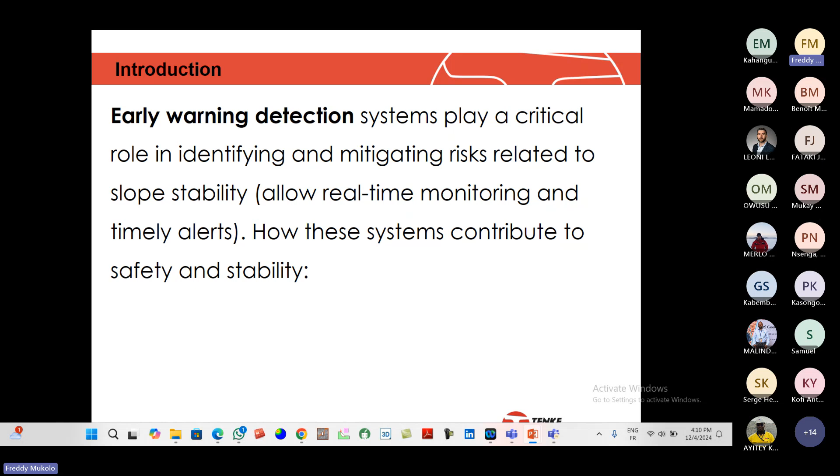Early warning detection systems play a critical role in identifying and mitigating risk related to slope stability, allowing real-time monitoring and timely alerts. How do these systems contribute to safety and stability?

First of all, we can use inclinometers, which measure the tilt and angle of slope movements, providing early warnings of instability. We can also use extensometers, which monitor the extension within a slope.

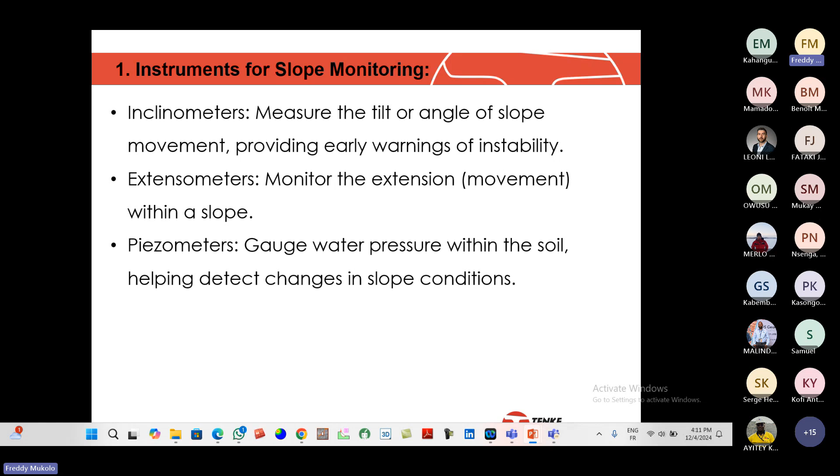We can also use piezometers, which gauge water pressure within the soil, helping detect changes in slope condition. We can also use radars, which help detect ground displacement in real time.

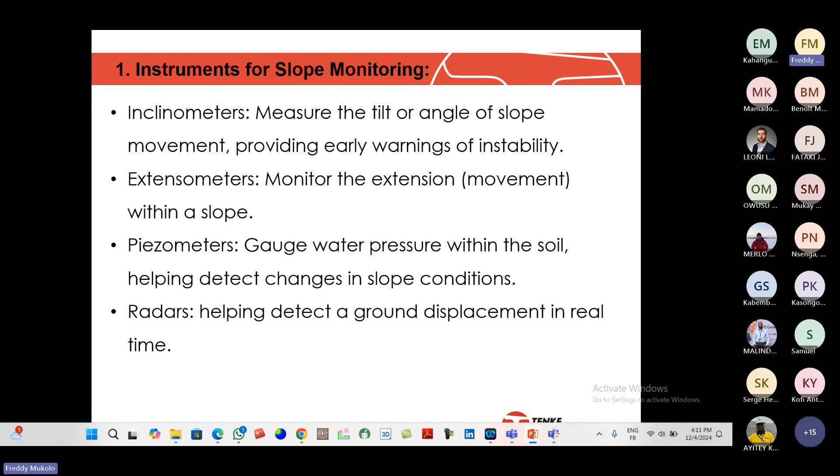What is the benefit of the early warning system? The first benefit is risk reduction. Early detection enables proactive measures, reducing the risk of loss of life and property.

Secondly is stabilization measures. Alerts trigger timely evacuation and implementation of stabilization techniques. And the third is cost savings. A single-degree increase in slope angle can save millions in stripping costs, but safety remains paramount.

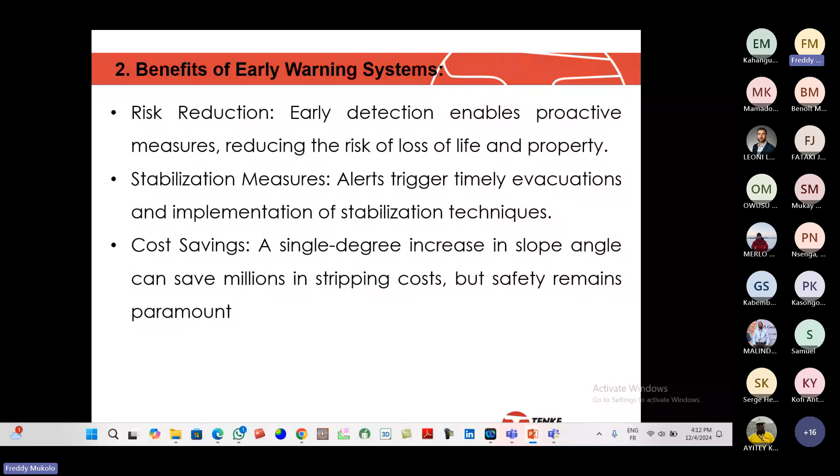Application of the early warning systems: we can apply the early warning system in open pit mines. In mining, monitoring high and steep slopes is crucial for safety.

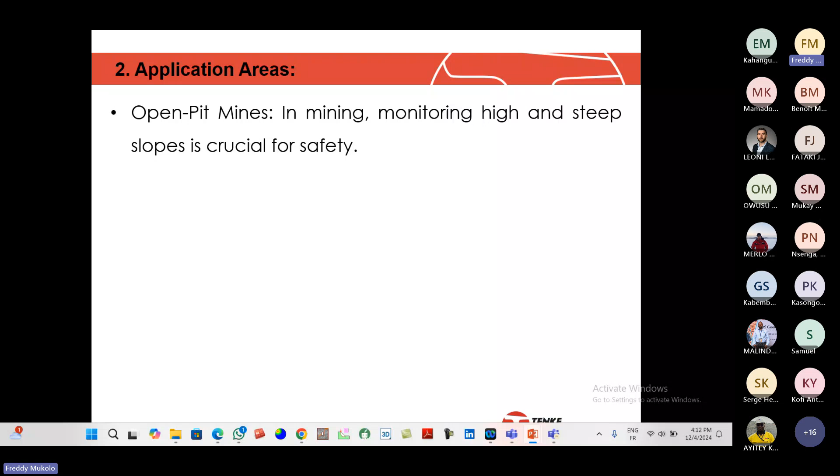We can also apply early warning monitoring in natural slopes. Early warning systems prevent disasters in hilly and mountainous regions.

We can also use the early warning system in infrastructure, which will allow us to detect any slope instability which can affect roads, railways, and buildings.

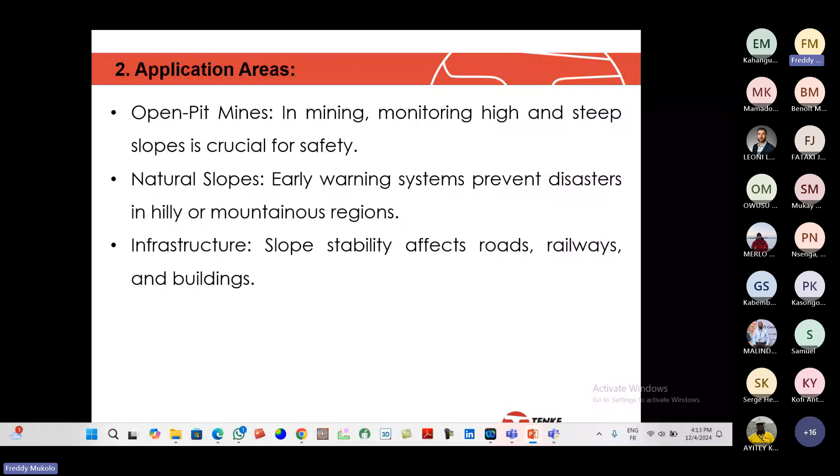What is the practical way to achieve the integration of early warning systems? The first is slope deployment and data collection, which means two parts. Instrumentation: we have to first install instrumentation such as radars, inclinometers, or piezometers at critical locations on the slope. Secondly, we have to implement automated data collection.

When implementing automated data collection, we also have to continually monitor the behavior of the slope by displaying the displacements, and maybe the water pressure in case we install piezometers.

The second way will be data fusion and real-time analysis. All the data has to be centralized in a data hub. We can use multiple techniques to combine information from multiple sensors, and we can also make a real-time analysis algorithm to detect any abnormal trends.

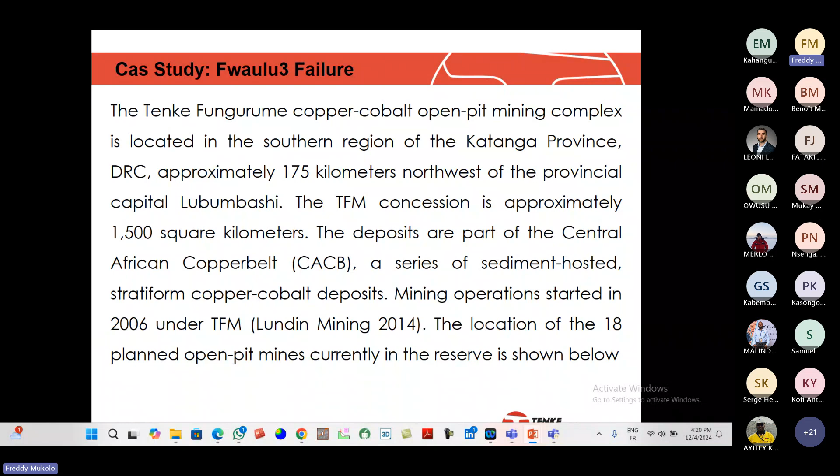Mining operation started in 2006 under TFM, Lundin Mining. The location of the 18 planned open pit mines currently in reserve is shown below. This is almost the location, and the failure occurred at this complex where there is Fwaulu.

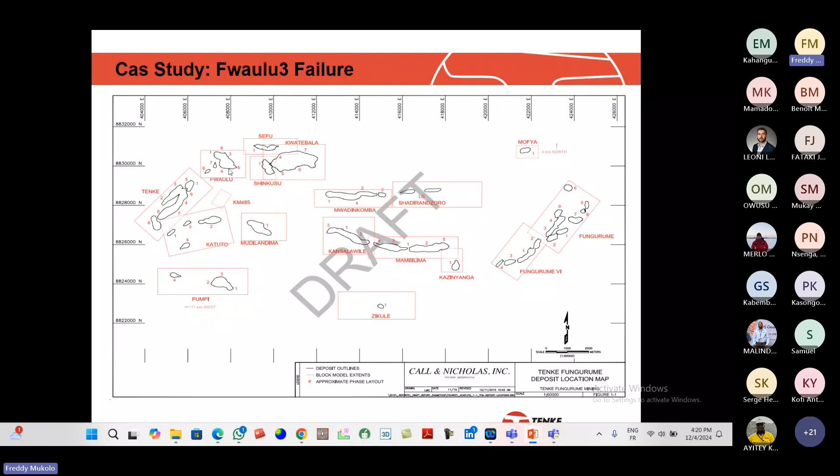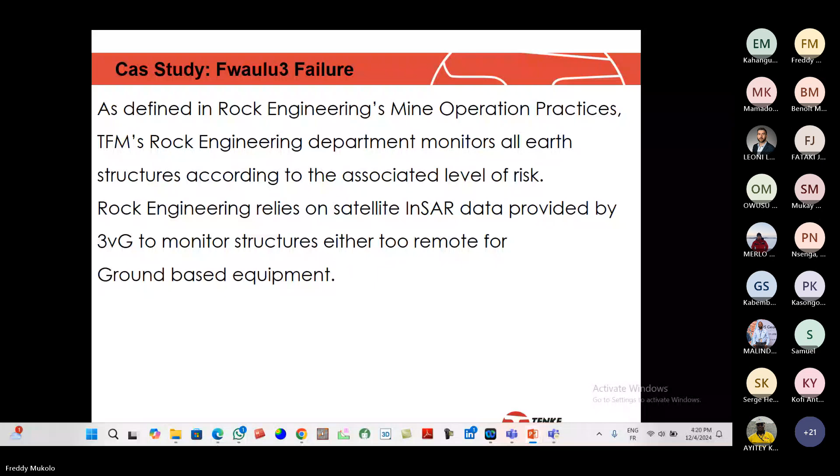As defined in Rock Engineering's Mine Operation Practices, TFM's Rock Engineering Department monitors all structures according to the associated level of risk. Rock engineering relies on satellite InSAR data provided by 3vG to monitor structure, either too remote for ground-based equipment. The rock engineer team reviews the data to identify areas which have started to move and where additional monitoring is required.

After field inspection indicated increased movements, an IBIS-FM radar system was deployed in January 2016 to monitor the movement in real time, because the IBIS-FM provides reliable early warning for progressing slope movements, potentially leading to slope failure, and can map long-term evolution of slow-moving slopes.

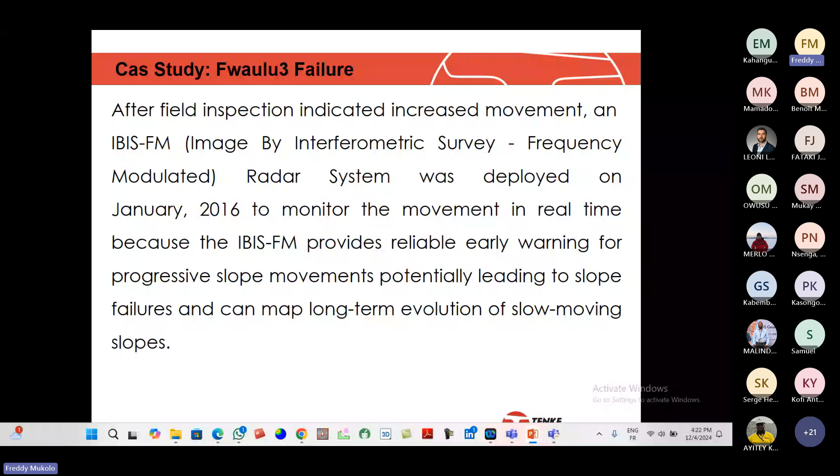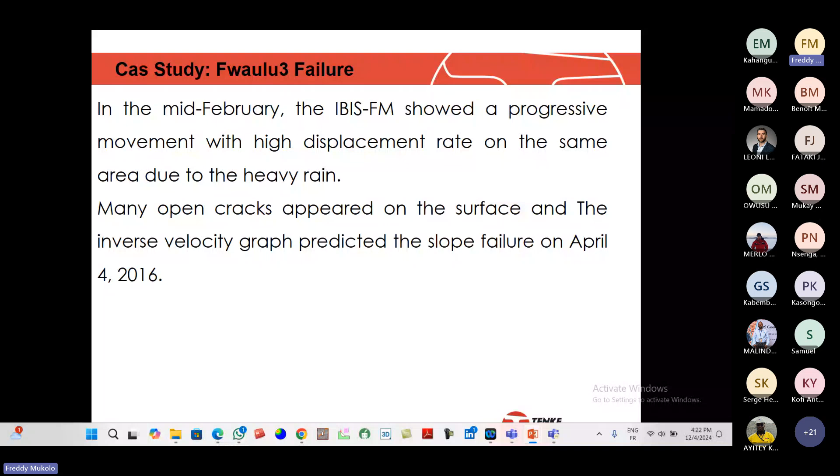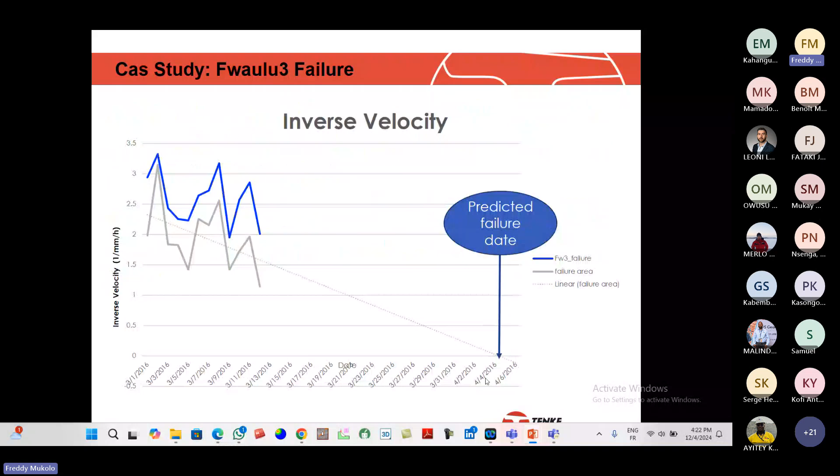In mid-February, the IBIS showed a progressive movement with high displacement rates on the same area due to the heavy rain. Many open cracks appeared on the surface, and the inverse velocity graph predicted slope failure on April 4, 2016. This is the prediction for the inverse velocity, and the inverse velocity predicted a failure on April 4, 2016.

In March we observed a very fast movement, and when we observed this very fast movement, some action was taken to make that area a critical area for critical monitoring. When we check the trend of the graph, you'll see the movement becomes very, very high, and the speed becomes very, very high.

This is the data record on the 11th of March. This is the second area, on the same place, which is showing almost a catastrophic scenario.

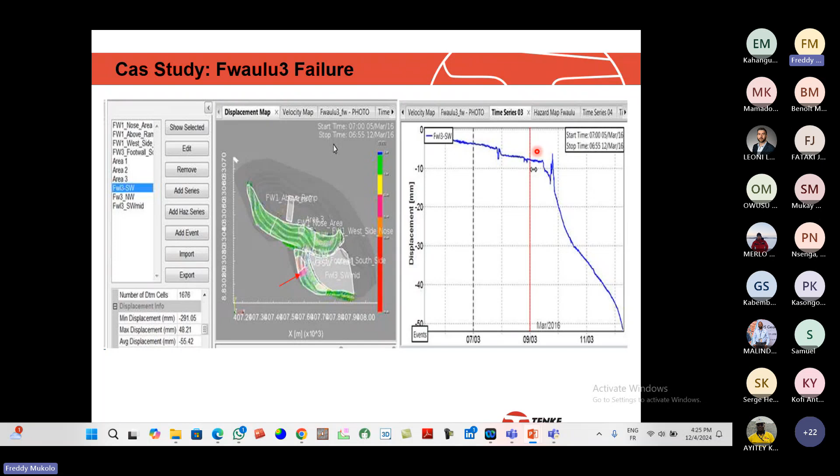After observing these movements, we made the decision to close that pit because we observed that the movement becomes very, very high, and this was very dangerous for people to work under this area. This is the situation observed in the field, and we sent an email to our security team to evacuate all the people working in this area.

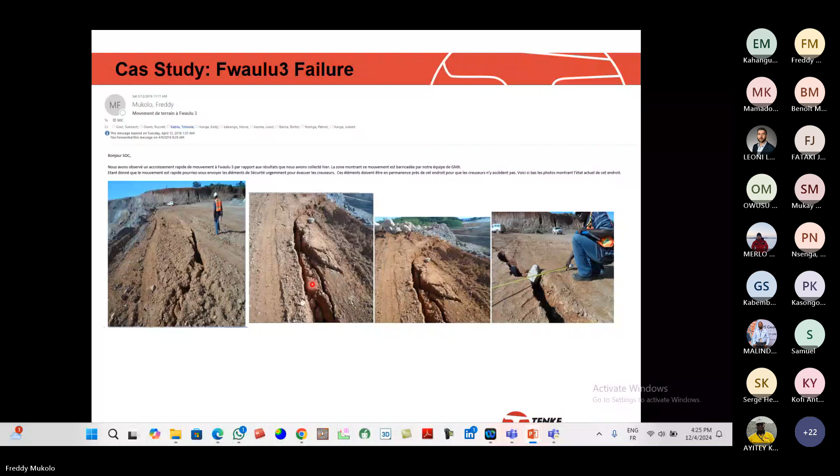During the progressive excavation of Fwaulu 3, a failure occurred in the southwest wall of Fwaulu 3 on March 12, 2016, at 1449. The failed slope extends between 75 and 100 meters along strike and has a height of approximately 45 meters, extending from the wide bench at 1425 meters to the pit toe at 1380 meters. The failure was controlled primarily by structure and was exacerbated by talcaceous material within the RAT/Dipeta breccia, and elevated pore pressure due to the rain season.

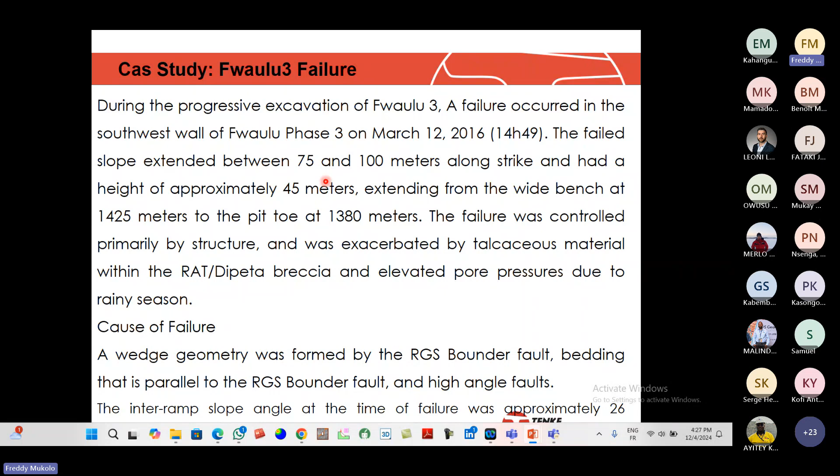This is almost the displacement graph, showing a time series of that moving area, and in this area is where we record a failure.

What this shows is almost the same thing. What we can say here is that the data received and recorded from the radars helped us to quickly take the decision to evacuate the pit without having injury, heavy death of people, or covering of equipment. And when we tried to go back and see why this movement increased a lot, we found that...

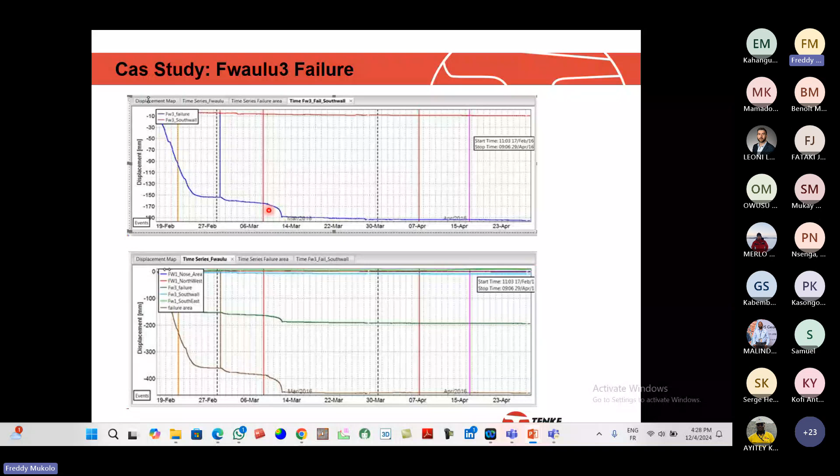this movement increased because of the rainfall recorded in February, and this confirmed why we recorded the failure earlier than predicted, which was predicted in April. This is almost the material, the failure material, and the failure records.

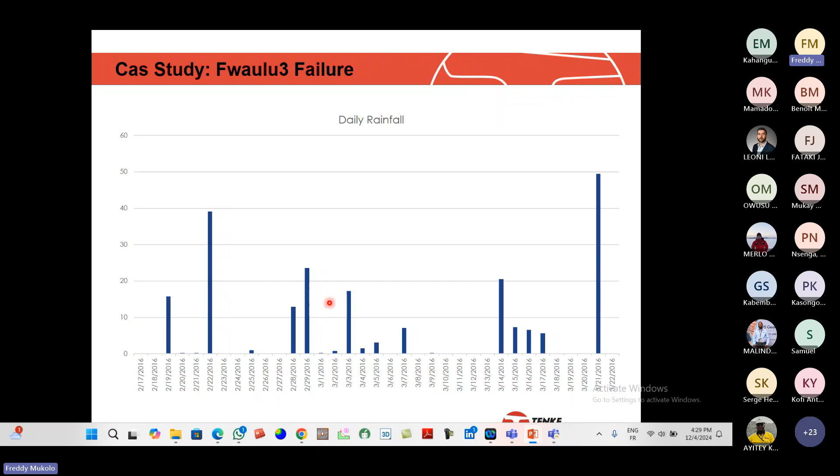And as you can see, our berm was somewhere here, and the failure material went beyond our berm limits. All the people were evacuated, and we managed this failure successfully. This is the presence of the talc, which contributed to this failure.

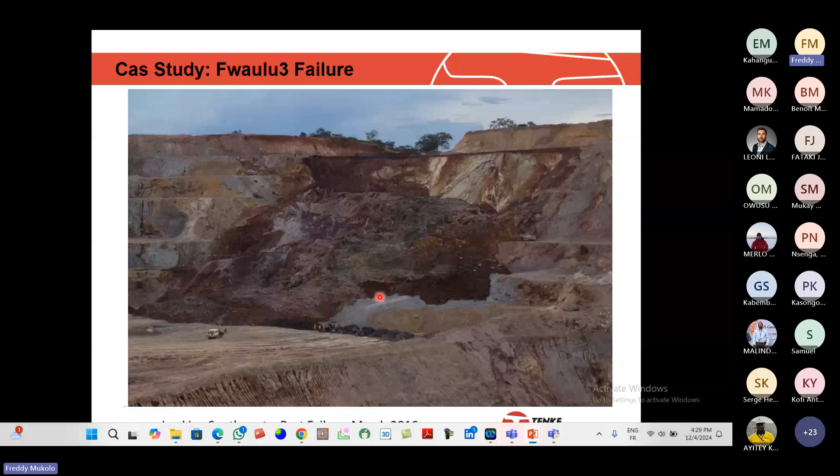In terms of remediation, TFM rock engineers and consultants recommended removing the failure material and creating a step out at the 1387.5-meter level. A rock berm was proposed before continuing the slope, with the direction perpendicular to bedding. Back analysis of the failure slope was completed using the SWedge software.

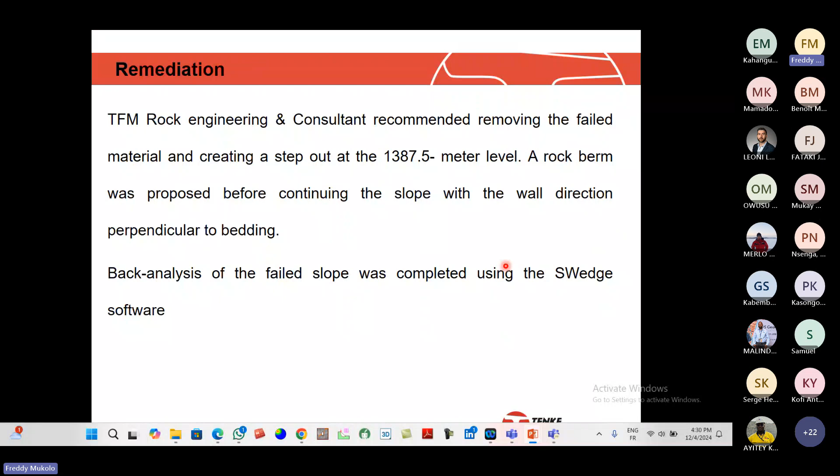The geotechnical action plan for working in the failure area was implemented, and this is an example of the gap which was made to remediate that area. In short, in this gap, we recommend working under radar monitoring, and the radar should work perfectly before starting any job in this failure zone.

In the case of a yellow alarm, the geotech will check the radar data and inform all the operations personnel on the future action. In the case of a red alarm, all people should evacuate.

In conclusion, mining excavation and weather generally affect the stability of slopes, and hence require proper monitoring even after providing support measures, especially under complex and heterogeneous geology. From this study, the significance of the IBIS-FM radar system for high slope monitoring with high accuracy around the clock is well evident.

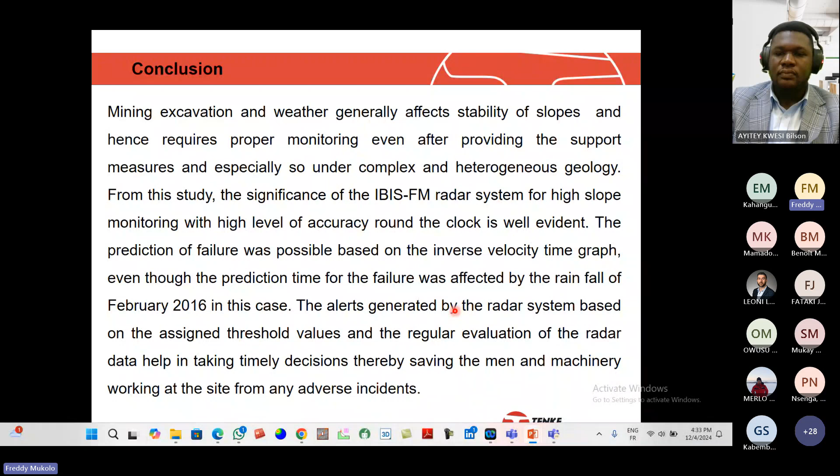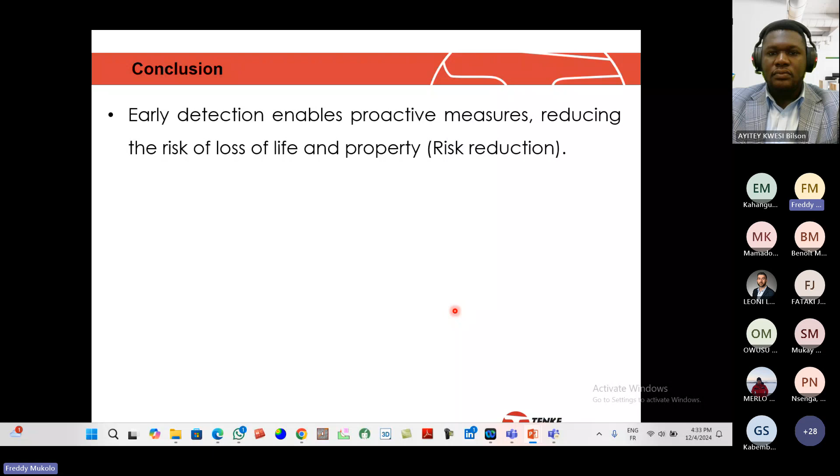Early detection enables proactive measures, reducing the risk of loss of life and property. This is the risk reduction: alerts seek timely evacuation and implementation of stabilization techniques. Integrating early warning systems into existing slope monitoring practices is crucial for enhancing safety and preventing disasters. Thank you.

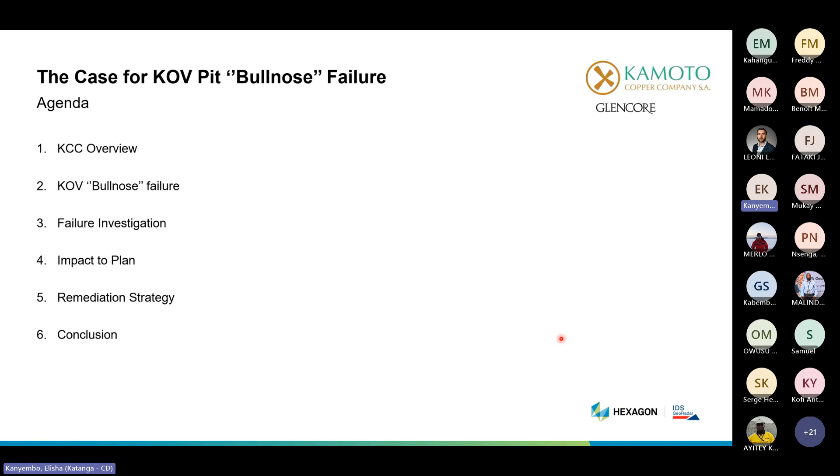So the agenda will be KCC overview, KOV Bullnose failure. I will be presenting the failure itself, the investigation we did when we had the failure, the impact to the plan - most of the time when we have a failure there is always an impact to mine planning - the remedial strategy we use to remediate the failure, and what should be the conclusion at the end.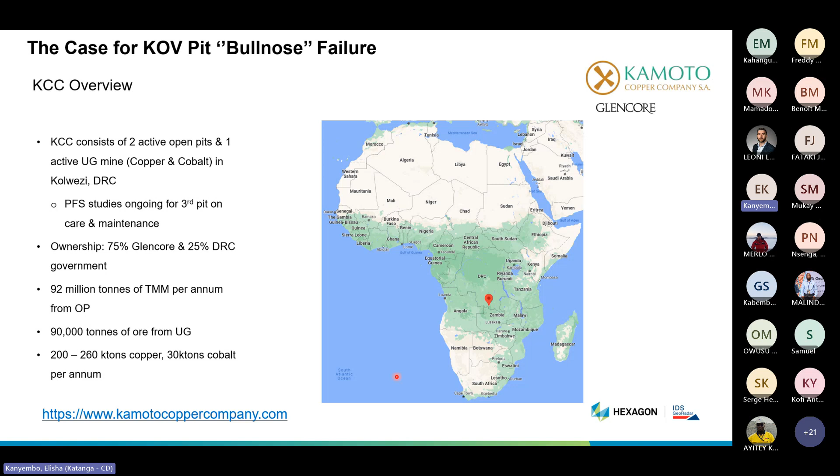The movement was tracked by our radar system. The red alarm triggered, orange to red alarm, and our TARP has been followed as stipulated. As you can see, there was 20 to 29 hours between the alarm and the collapse, between orange and red alarm, so there was enough time to manage the evacuation.

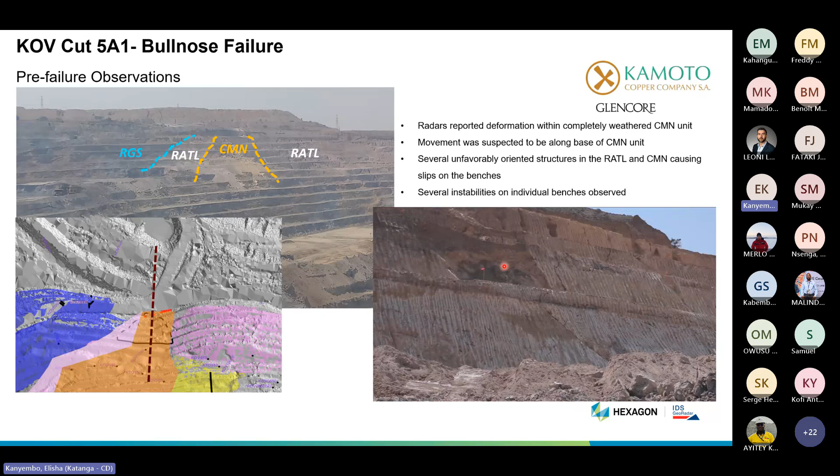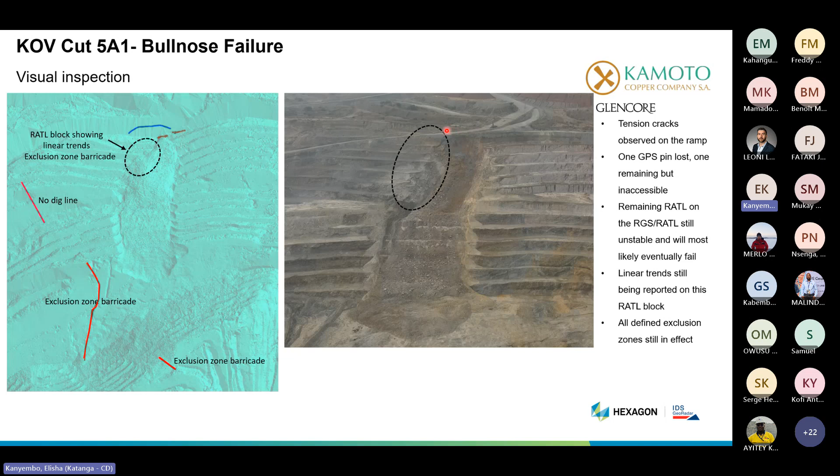And then quickly, this is the failure timeline - I could present it to you guys the way we managed this failure. I can share with you some confidences: since we had that fatality in 2016, we were using a radar system, but the problem was the communication, which was also problematic at that period.

After that fatality, I gave myself a commitment that it would not be possible as far as I would be waiting for KCC to have another fatality, because as a geotech it is really sad - you have to prevent this kind of catastrophic event, but the main purpose is just to save life. And if you fail to save life, that is not something you can appreciate in all your life, because that will remain and you will remember it all the time, so it is not good.

But here we can see that we followed the process. In June to August, slow linear movement was detected on the slope from our ground-based radar, which is the IDS radar, the one that we are using.

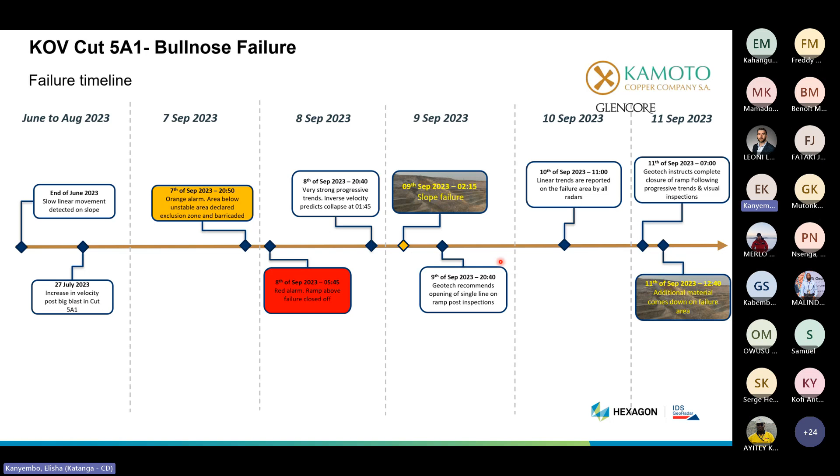Now the failure investigation — the failure occurred, so the work of a geotech didn't stop there. We must now investigate what the failure mechanism was, what drove all of this instability, what the issue was. This is what a geotech has to ask himself: what was really the main issue, what caused this failure to happen? Because the design had been done, reviewed and analyzed, and we provided all that was supposed to be done, but how is it that the slope didn't stand?

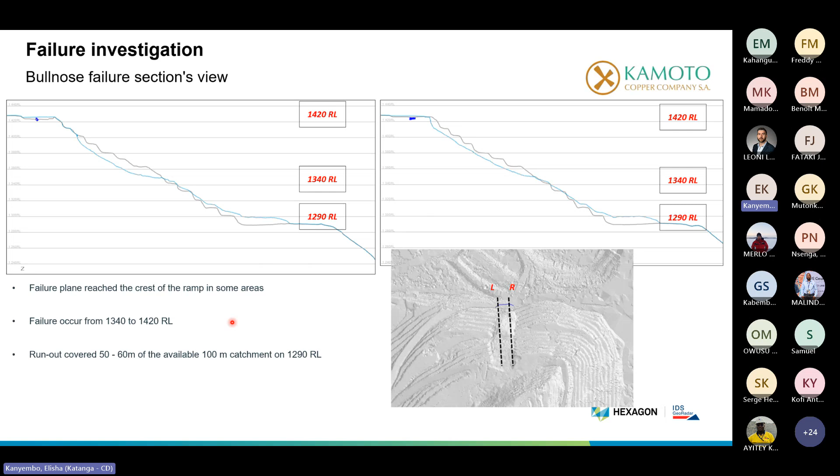You can see here that it's the top benches that failed, and the failed material overspilled on top of the bench below and filled the 1290 RL. At the two sections, they show almost the same situation. We went through and investigated the failure mechanism — we have boreholes within this area, so we checked some boreholes and logs, and we found this KOV 1085 borehole.

This one, because this is the failure where the failure occurred. And we found that the failure surface aligned with the initial hypothesis that we were just investigating, that the instability is driven by that contact, CMN-RATL contact. So the location of this contact will determine how far back the instability can extend.

Because we said, okay, let's look at this data. And we checked the TECT model, and we found that this contact is not in the TECT model, because this CMN here was logged not as CMN, but as saprolite. This was also the mistake, because when we did the model and analyzed the design, we didn't take into consideration that we have CMN talc within this contact. So it says saprolite, but it's different from CMN talc, and the confidence in orientation, etc.

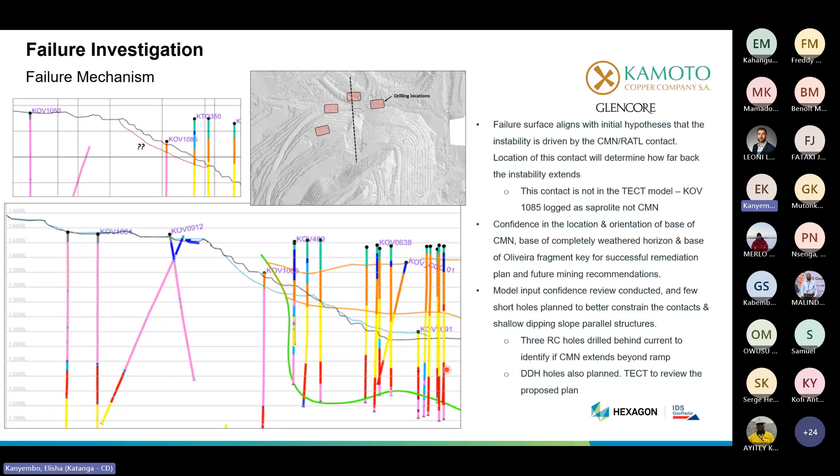So we found that, and we said, okay, in this case, let's drill some additional holes within this area just to try to demarcate the extent of this CMN-RATL contact. We should first understand where the contact is, because we know that contact is the weak contact that has driven the instability. After the geotech assessment, etc., we drilled, tried to understand all of that, and demarcated the CMN-RATL contact.

But what was the impact to the plan? Imagine at the top here, there was the main access to the North Dump. The North Dump is the biggest waste dump in KOV, where all the waste from the mine is dumped. This access is at the top of the failure, so it was closed and blocked. We could not send waste material to the North Dump in the meantime.

But we had the other dump, Mashamba North Dump. So we could just send waste to the Mashamba North Dump, with the risk of filling this dump faster than planned. So you see that was the impact to the plan. And also the impact to the plan was on reduced ore tons and copper content in 2024, so it has impacted even the production of copper content in 2024.

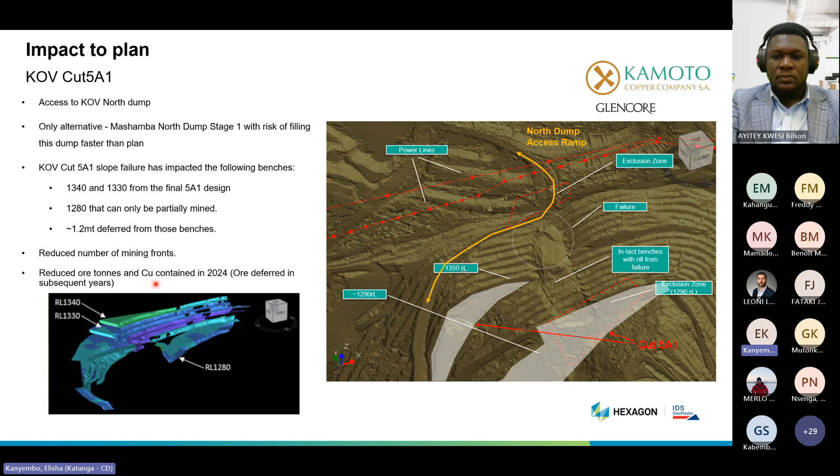But within the same area, we have pole lines, electrical pole lines. I think within the same area there's the power line and also the relocation of the GCI North power line. So we have power lines here, and they were the constraint for the new access.

Anyway, what we said was the remedial strategy: there is this access to the North Dump, and there is a design that, first of all, we said let's clean up. There is a cleanup of the catchment below, and a cutback design, all of them. So we found that to remediate this situation, let's have a temporary access, try to clean the material that filled our catchment below on 1290, and let's create an access here on 1350 so that we can stabilize the area.

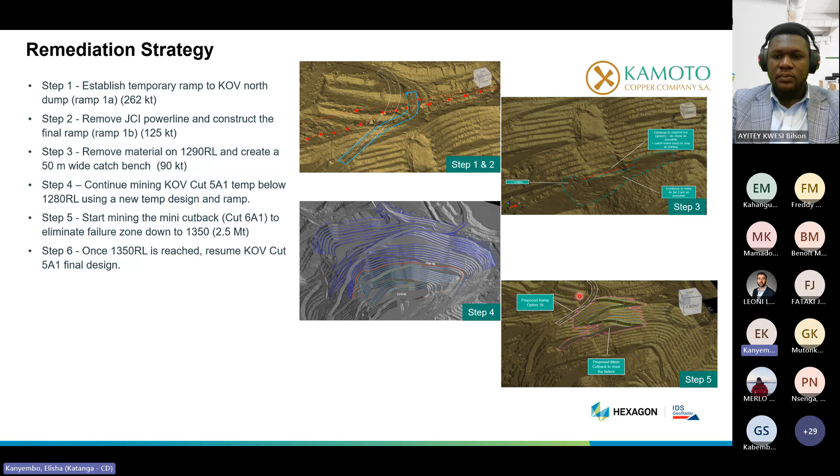So all of these things were just options, okay? And definitively what we did is clean up the failed material. We cleaned failed material, I can say overspill material, on 1290 RL. So we cleaned that one. We put a risk assessment together and we cleaned safely.

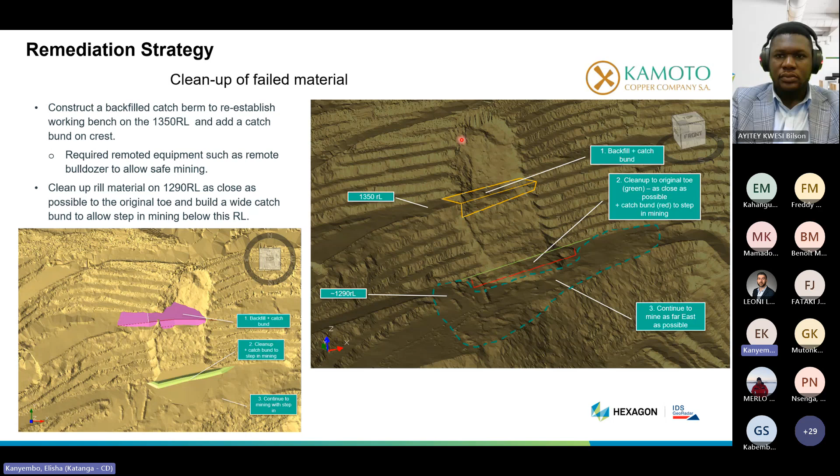And we said, let's go and establish the catchment, the bench here on 1350. For this one, we didn't succeed, we failed to make it. At the time we were doing that, the hanging material on top was just falling down, and we abandoned that option. We moved to the cutback option.

So this was the proposed cutback, and this is what we did. So the design of a mini cutback, and we mined with this design, which took into consideration the drilling we did to demarcate the CMN-RAT contact. The cutback design took that into consideration, so that we mine all the CMN and leave the slope only in RAT, which is good material for us.

It's not that good, I told you that the weathering here in KOV Mine is really high. So fresh rock, yeah, is not the language we're talking here, fresh rock. We only have highly, moderately, and completely weathered material.

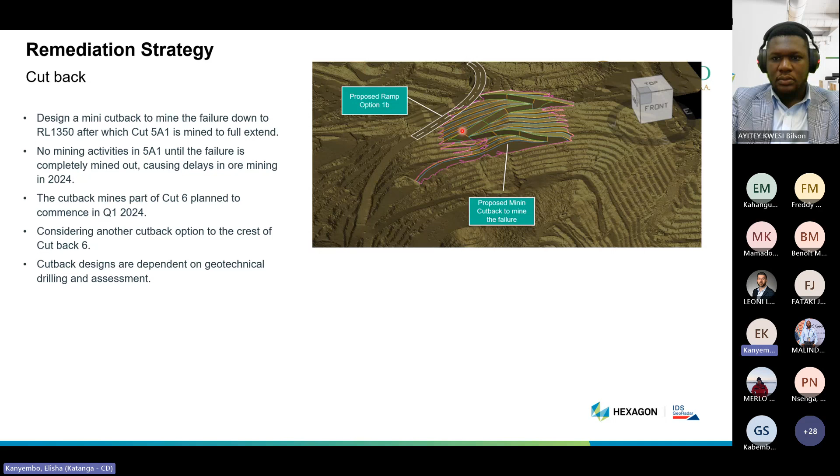So we went with this mini cutback, and we cut. It was a good work under radar monitoring. All the remedial work has been done under good supervision, with visual inspection and radar monitoring. Anytime there was movement, we stopped activity, did visual inspection, amended the recommendation, etc., up to where we finished the work.

So you can see this is the mini cutback that we did, and we cleaned up all the failure. You could see the difference between the failure picture that I started with during my presentation and this end picture, the last picture. This is the remediated failure. Right now you can see that we established all the benches up to the 1350 RL, and we continue with the normal design, what I call Cut 5A1 final mining, progressing.

Actually, this is an old photo because now we are on 1280 RL. So we continue with the normal design now. And the area at the back is stable, sitting, with no further movement within this area.

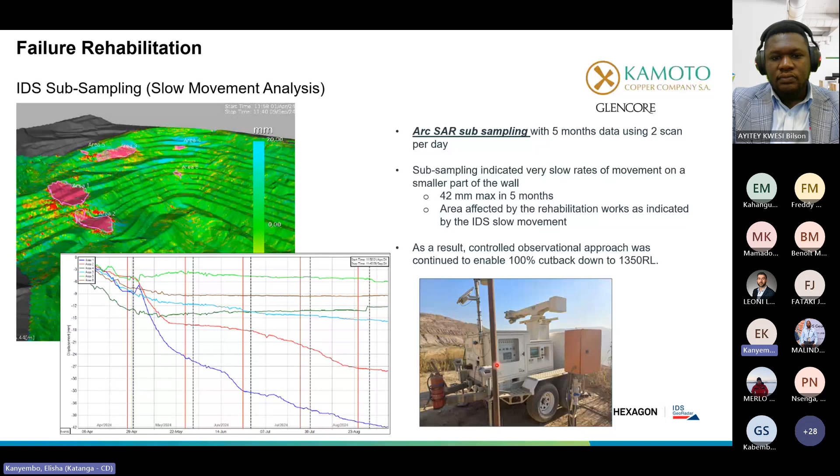As you can see, we did even slow movement analysis. The subsampling has been done. We took 5 months of data using 2 scans per day, and the subsampling is showing us 42 millimeters maximum in 5 months. That means the movement is very slow and nothing to worry about for now. And we have this ArcSAR which is monitoring that area.

So guys, this is the end of my presentation. The key takeaways for you guys, the one that I think you can remain with, is proper management of a structural control failure, like this one for KOV Cut 5A1 nose failure, by using slope monitoring procedure, interpretation of failure mechanism, and remedial plan.

So the proper management is using the monitoring procedure properly. You must have your TARP, and your TARP must align with your site. You can't copy my TARP and use it at your site. Every specific site must understand the failure mechanism of the area by doing back analysis, and you come up with your threshold for your alarms that match well with your site. And this is what you're going to put in your TARP.

And you must very well interpret your failure mechanism, so proper core logging, face mapping, you understand all your structure, etc. And you must come up with a good remedial plan as a geotech.

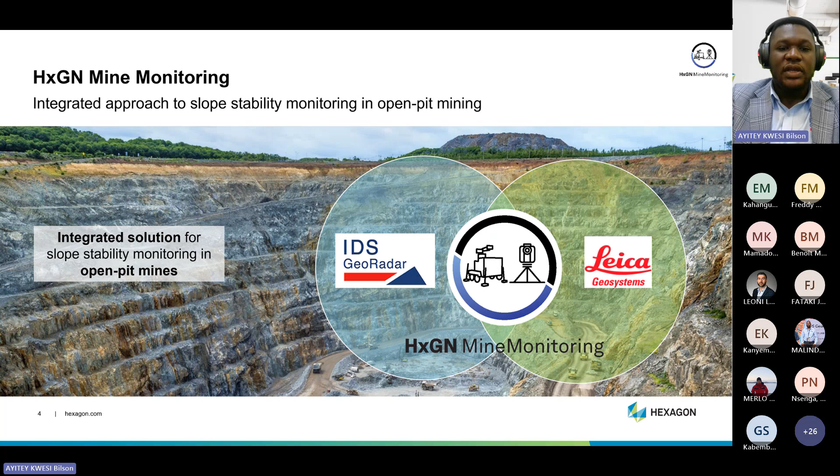So essentially, what you will find is that all across your mining operation, we have different systems that do various things in different capacities to help you manage your entire project or operation. From your far left, you can see where we have the satellites, InSAR satellite systems, where we are able to monitor remotely and send and provide reports to you to do your monitoring.

We also have the GNSS systems and the GNSS antennas for long-term monitoring. And then we have the fleet of radars, including the IBIS FM Evo, the IBIS Rockspot, the IBIS FB, the Hydra X, and the IBIS ArcSAR, our flagship radar system.

So all of these systems form part of the interferometric radar systems. And then we have the geodetic sensors, the Leica Nova TM60 and the Leica Nova MS60. They have slightly different functions which allow them to monitor different campaigns long term. We can sum it up with the Geo Monitoring Hub software, which combines all of these instruments and allows you to have one concise data platform where you can review and analyze everything you are picking up.

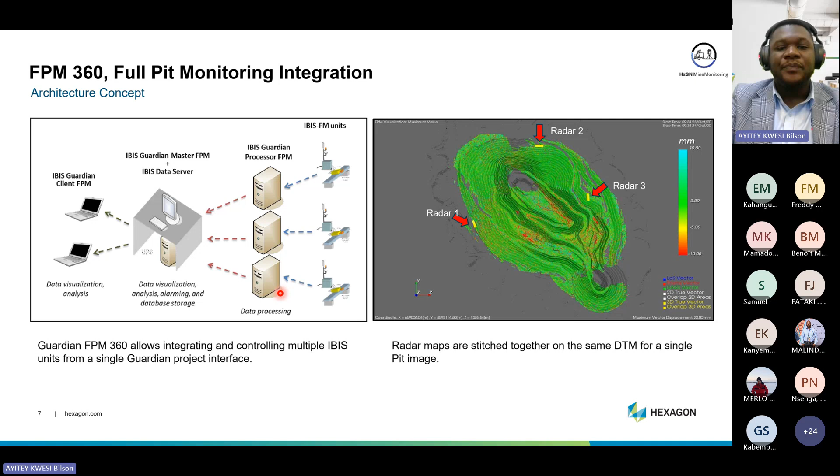The FPM 360 basically is a system that allows you to combine multiple radar systems, multiple IBIS radar systems. We can have two radar systems combined or even three, as we see in this example here. All of this can be done using the IBIS master license or the IBIS FPM 360 license for multiple radar systems.

This is basically what the architecture looks like, where we have different radar systems talking to their processor systems, typically in the office, and then all of that data is consolidated onto the data server, which can be accessed with the FPM clients for analysis, or you can have the Guardian Master FPM, where you can set your alarms and thresholds and make sure you are receiving real-time data.

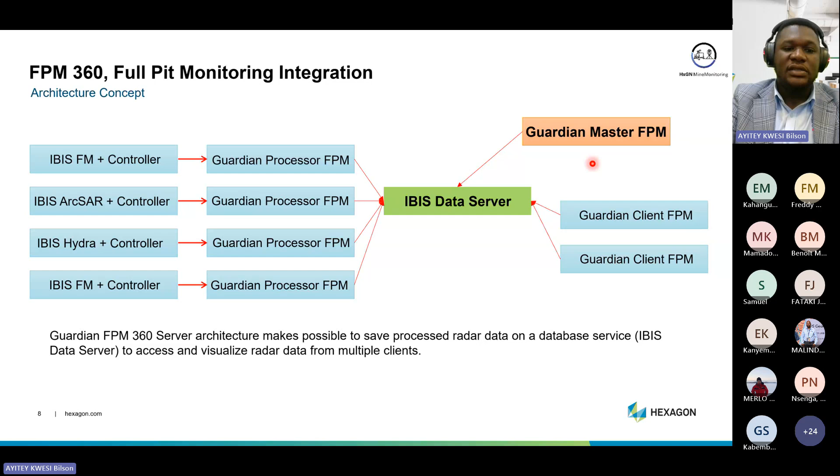So in a nutshell, this is what we expect it to be able to do: the processor FPM receives the project from one of the radar systems. One radar system connects to one FPM processor, so in this case, for example with an FM, it can show you the maps. You can create points and areas and time series. But what it cannot do is create a hazard map or a hazard time series, and it cannot export data.

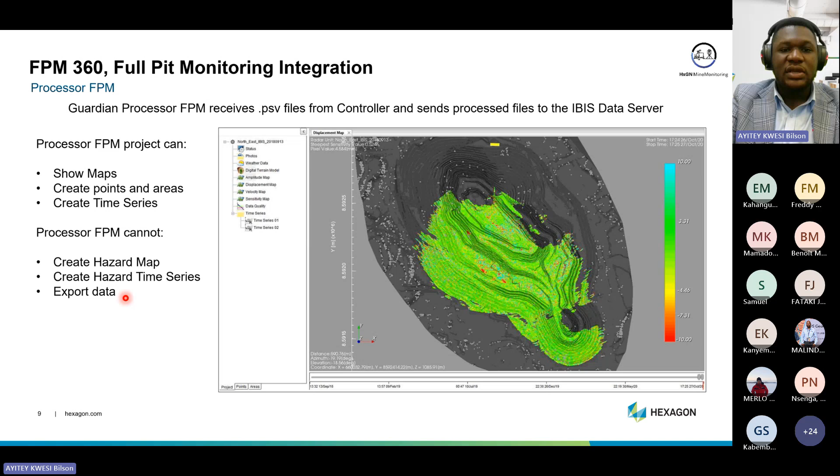Moving forward, the master FPM will be able to combine two different systems and create one huge map for you, where you can visualize the maps and the time series. You can import and export data, and then create and set hazard maps and hazard time series.

Once that is done, you can visualize it in different sections, whether you want to visualize one at a time, like we have at the bottom here, or you can decide to visualize both of them from the top, like you can see here. You can also open them into multiple windows for different monitoring scenarios that you are observing.

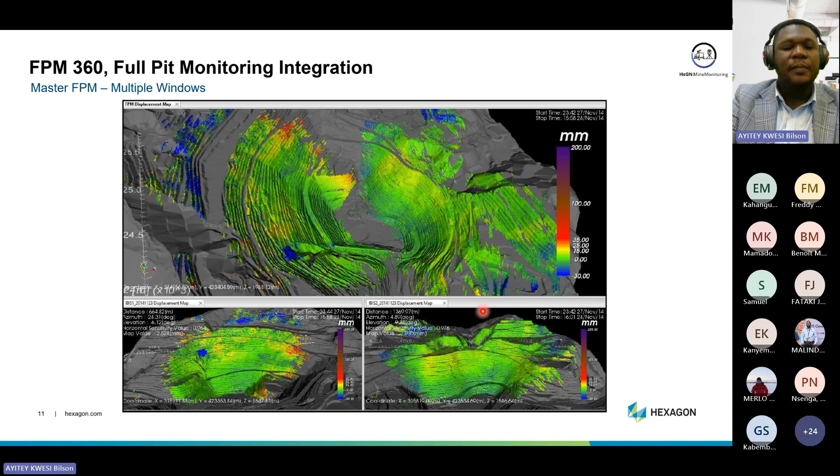Like we said previously, what you can do is the hazard time series or just the regular time series for analysis, and you can plot points and do all manner of analysis with it.

And once you want to set your alarms, you will be able to set alarms for even individual radar systems, as we can see in the picture. It will be possible to set different velocity thresholds under the same rule, and it's also possible to disable a radar unit if you don't want it to appear in the alarm. You can just do that by clicking on the squares beside them and disable them.

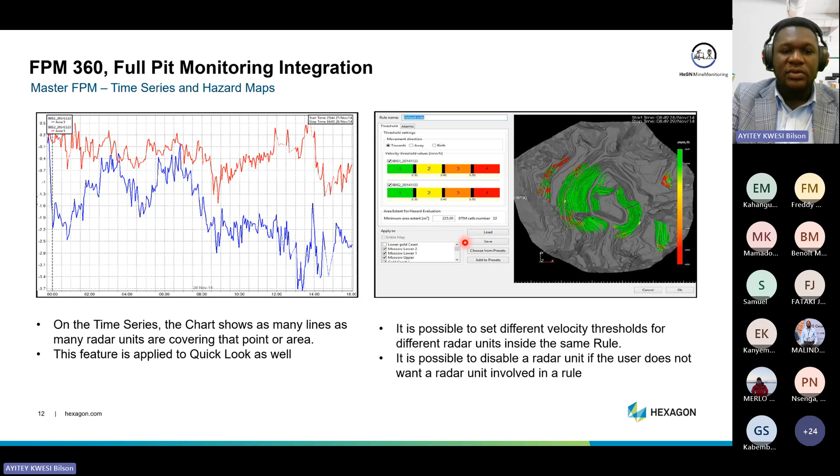What this also allows you to do, because you are combining them, is visualize your data in 3D. That allows you to see the vector, the direction, and the magnitude of the areas that you are monitoring. You'll be able to see the direction in which it will fail, for example, if that is what you are looking to see. It allows you to do that because the data becomes 3D data, giving you the magnitude, the direction, and all of that.

Once you combine them, any overlap areas should ideally give you the exact or correct vector diagrams that you're looking for. In this area, for instance, you should see that here and in these areas. And in cases where you have 3 or more than 3 or 4 radars, you can see multiple overlaps, and those areas become even more accurate with that.

And it is only the IBIS radar systems that are able to do that currently. All other radar systems on the market are not able to do that.

We will quickly now look at how to integrate the data with the GNSS systems. Basically, what that means is that if you have a TM60 and you want to combine the data with an IBIS AXA, you can plot all of that data onto one DTM map, as you can see in the picture here, so that you will be able to compare the results you are getting from the radar and juxtapose it to the results you are getting from your TPS or your GNSS system.

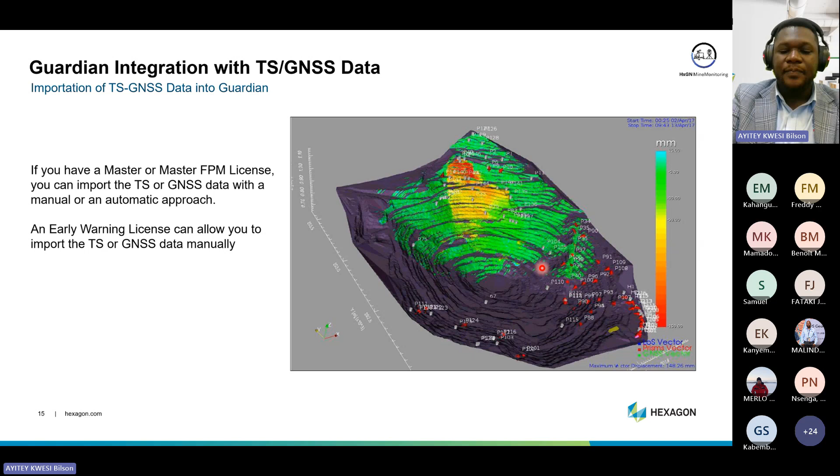In order to do this, what you will need is to get an APN, which is a license, and when that is installed onto the computer, it allows the two systems to talk to each other. To do that on your project pane in your Guardian software, at the bottom you should see Prisms and GNSS. Once you click there, you'll be able to see import. Once you click on that, it will connect to the GeoMOS system and import all the prisms in here.

Once it imports the prisms and you allow it to show on the map, this is what it should look like. In this case, this is an example of a mine showing all of their prism systems that have been installed onto the same pit map. With this done, it allows you to visualize the data, so you can plot points on the map.

And then analyze it together with points that you are receiving from the TPS and or the GNSS system. So you can create custom maps, custom time series, and all of that to do your analysis. This also gives you the opportunity to see your line of sight vector.

What that means is that it will be able to project it in 3D for you. So just like when you combine multiple radars, this one will also allow you to see the magnitude, the direction, and all of that with the GNSS system.

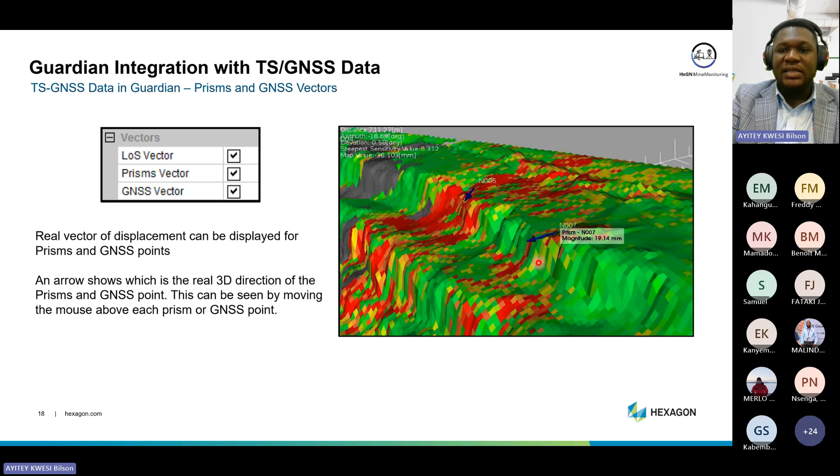And in that same case, you can see the vector graph here, where we have the X components and then the Y components of different portions that have been plotted onto the maps.

So quickly, we will look at the two case studies like we mentioned from the beginning. The first one is a pit wall failure that was detected through early detection monitoring, and then the geotech analysis that was done as they tried to do stabilization buttress. This was in BHP, Australia.

So a quick background, BHP's Western Australia Iron Ore has 5 open pit mining areas in the Pilbara district. Each of these pits is within 100 to 200 meters. These pits use single and double bench configurations with batter heights of about 12 and 24 meters.

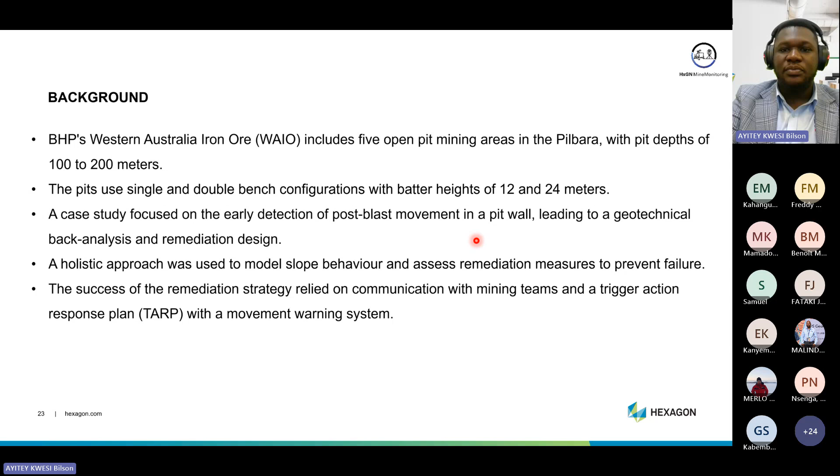Now, the case study focused on the early detection of post-blast movements in the pit wall, leading to a geotechnical back analysis and remediation design. Going on with that, they were able to model the slope behavior and communicate with the other teams involved in the mining, and through their trigger action response plan, they were able to remediate the entire problem they had. Now, we will look quickly at the lithology, which is a formation of the Proterozoic Hamersley group within that Pilbara region.

That is predominantly what is there. This consists of a thick detrital sequence made up of red ochreous material and tertiary channel deposits. What that means also is that it's mainly siltstone, gravelly siltstone, and vuggy breccia, which are prone to rock mass failure due to the soil-controlled nature of the material.

At the base of the slope, the exposed West Angeles member contact units overlay the Mount Newman member. This shows that there are different lithologies overlaying each other, which makes it very prone to failure. Now, their monitoring setup at the time of the event included InSAR data coming in.

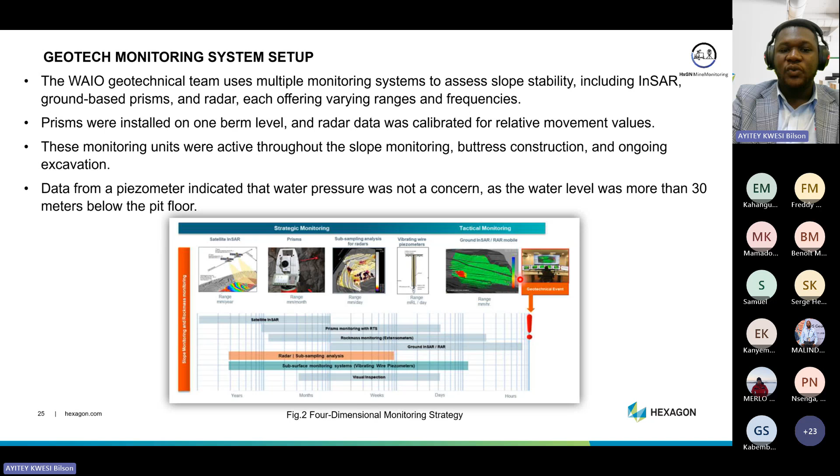They also had PRISM monitoring data, and then they had the IBIS radar system. They also had VWPs to aid with what they were doing, but they realized that the water pressure was not a concern as the water level was more than 30 meters below the pit floor. They also had some other services, the 24/7 monitoring services, which allowed them to monitor even more accurately.

So in brief, this is what it looks like in terms of their monitoring setup. Tre Altamira supplied the satellite data, and then they had the ground-based prisms from Leica, and then they had the radar systems.

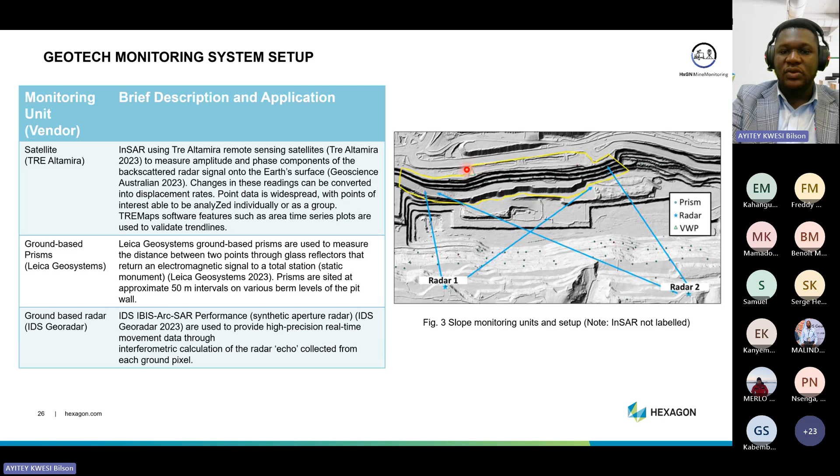After an in-pit blast, that's blast 1, the slope exhibited an initial linear deformation with a 10 millimeter relative displacement in the first 24 hours, recorded by the radar. The deformation rate then slowed, showing a regressive trend with a displacement rate of 1 millimeter per day over 3 weeks, totaling around 20 millimeters of movement.

Following this, alarms were adjusted and the movement further regressed to about 0.7 millimeters per day. Then the berm loss occurred due to weak wall materials, because of the lithology that was there. So when mining cut past the center of the movement area, a 15 millimeter displacement occurred within 24 hours, leading to a temporary halt in mining. After resuming operations, the displacement rate increased again to 3 millimeters per day for 3 weeks straight, then slightly regressed to about 2.5 millimeters per day for 2 additional weeks.

Throughout, geotechnical inspections were done and radar monitoring also continued. They didn't stop there.

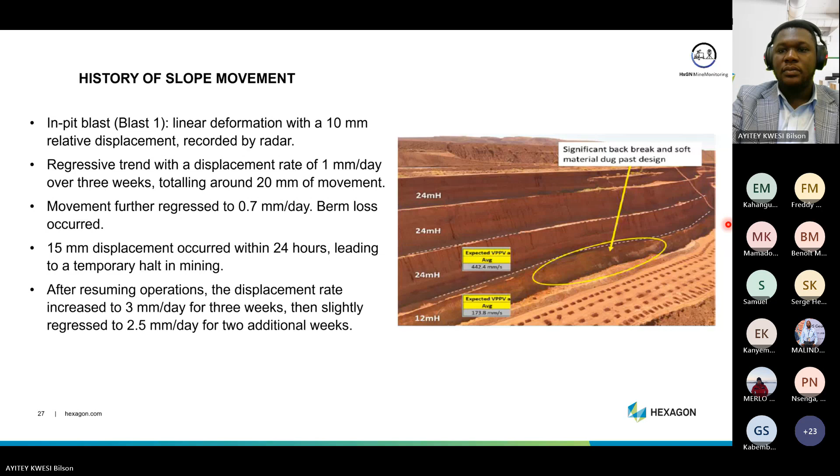3 weeks after mining, a second blast, blast 2, occurred 300 meters from the movement area. Initially there was no radar or prism change, but 7 days later, 10 millimeters of displacement was recorded within 12 hours, and cracking up to 50 millimeters behind the pit crest prompted closure of the area. As we can see in the photos, there was cracking at the crest of the wall. Some cracks showed 300 millimeters dilation and were linked to kinematic buckling from stepped excavation.

After 65 days post-blast 1, with 135 millimeters total displacement recorded, the radar and prism data revealed progressive slope movement towards failure. Although velocity changes made predicting failure difficult, stepwise increases in velocity indicated impending failure.

A detailed slope model assessment began after the closure. So we will see that here.

65 days after the initial movement from blast 1, and 30 days after the mine was completed, a total of 135 millimeters of displacement was recorded in the central slope area. All these areas that were created here were analyzed, and they found that an average of 135 millimeters was recorded within the entire period. So they could see the failure coming down from the top bench there.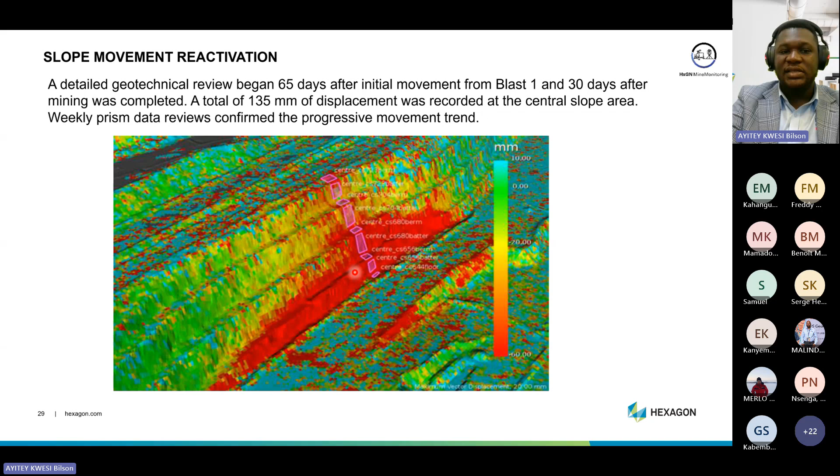You can see that in the analysis that was done here. Now you can see blast 1, which sort of triggered the entire sequence, and then blast 2, which made it go all the way through. And you can see other triggers that were observed in these areas here.

The displacement graphs show velocity changes triggered by the blasting. If you correlate the data from the prism monitoring, you can see how it correlates, going through as expected. So they could determine clearly that it was the blast triggering all the accelerations they were seeing in the movements.

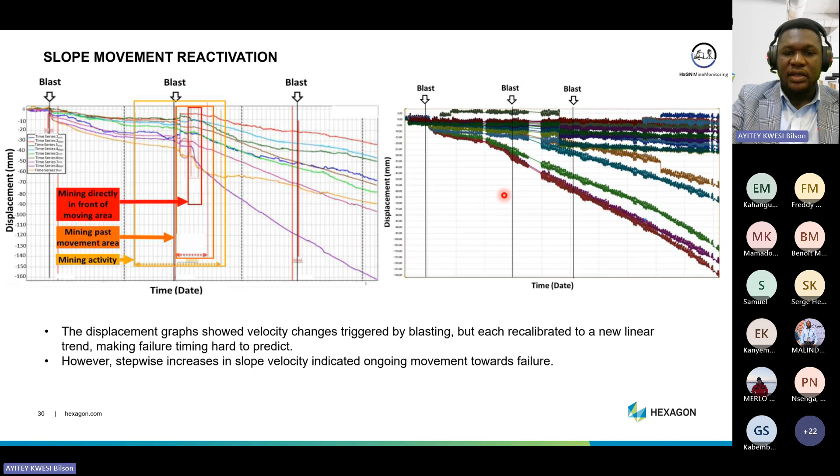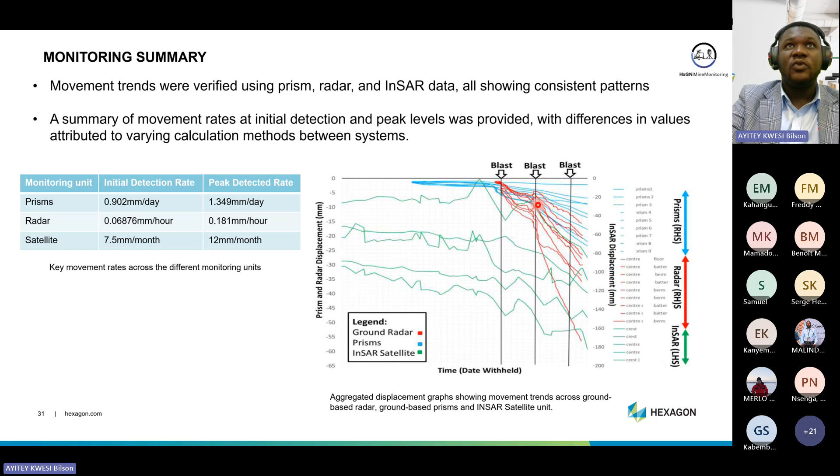In summary, the prisms found about 0.9 millimeters per day in movement. The radar also detected 0.068 millimeters per hour. Then the satellite data, the InSAR, showed about 7.5 millimeters per month. But these were also the peak detections that were done. When you juxtapose all three, we have the InSAR data, the prism data, and the red one is the radar data. You can see how they somewhat correlate, and we are able to determine what is happening is consistent.

Now, in remediating this, there are 3 geotechnical options available according to the National Resources Conservation Service 2005. Either you unload the crest, which will reduce the active driving forces, or you reinforce the toe of the slope, which will increase the resisting forces, or you allow the failure to safely occur and then remediate the outcome.

The operations determined the buttress needed to be 20 meters wide for operational purposes and 16 meters high to stabilize the exposed fault and minor failures. The analysis also compared maximum shear strain in the original design versus the buttress design. After confirming it met safety criteria, the buttress was approved for execution.

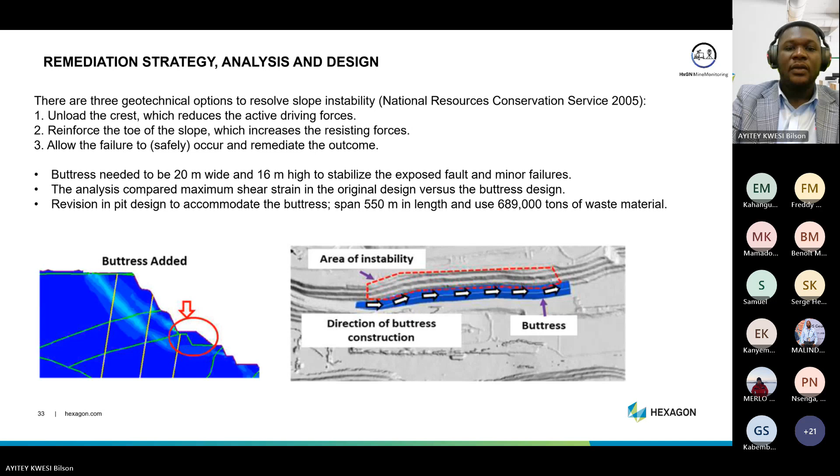Moving forward, the buttress construction began 135 days after blast-induced movement, with a cumulative displacement of about 260 millimeters by that time. The radar was also able to track the buttress effect, showing progression from west to east, like we can see in the photo. Red areas on the radar indicated sections not yet covered by the buttress.

A batter scale failure caused by changes in stress was detected and monitored. Meanwhile, regressive movement was also noted as the buttress advanced, though interference from the tracks affected radar readings in fully buttressed areas.

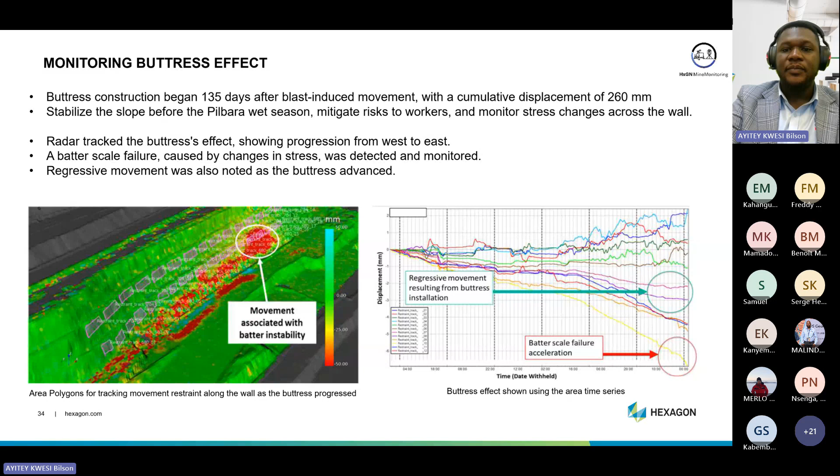So you can see once the buttress was added, there were changes in the progressive movement that was earlier seen. If you move forward, you can see the area of instability that was observed, the area of rilled material, the buttress progression, and relative stabilization after a period. You can see the same thing on the other side as well.

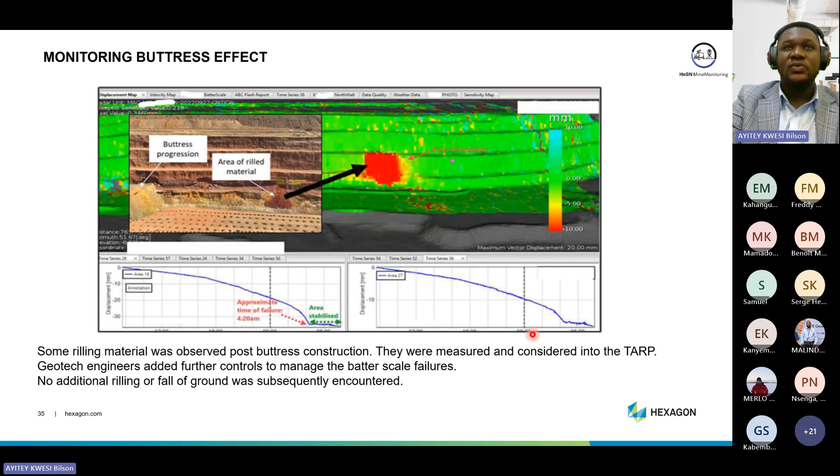When that was compared with the PRISM monitoring data, you could see the regressive movement that had started trending, and you can see that also on the radar data along this section. So long-term displacement rates show the slope stabilization post-buttress construction.

In review, they also attempted to verify what was seen at the beginning. So at the beginning, this was what the radar was seeing pre-buttress, and then after the buttress was fully constructed, we could see that it had stabilized.

This was also confirmed using the INSAR data, where we could see the area showing all these red dots here, which is how the INSAR data shows, and it was showing a deceleration trend as it moved ahead in time.

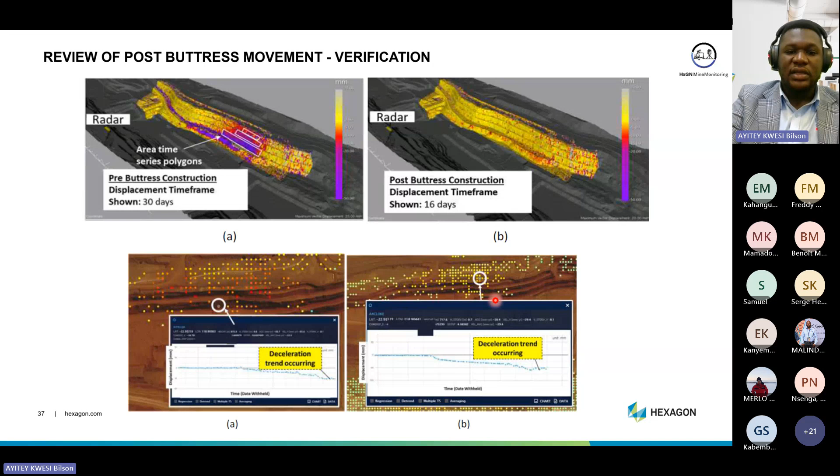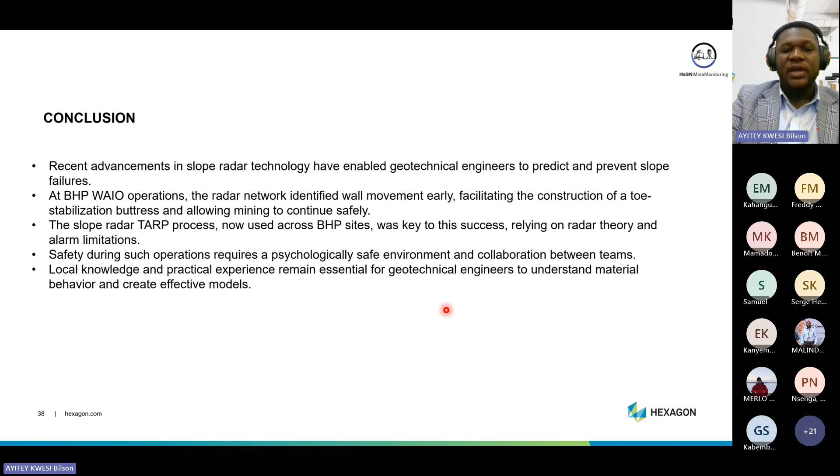In conclusion, the slope radar technology enabled them to predict and prevent the slope failure. They've also updated their TARP, and now across BHP sites, since this was key to their success, they rely on the radar theory and their alarm limitations to be able to work in the safe environment like they expect it to be.

Now I'll quickly move through the last one because of time. This is a mine in Brazil, the J. Mendes group, where they have both the IBIS system and the TPS system.

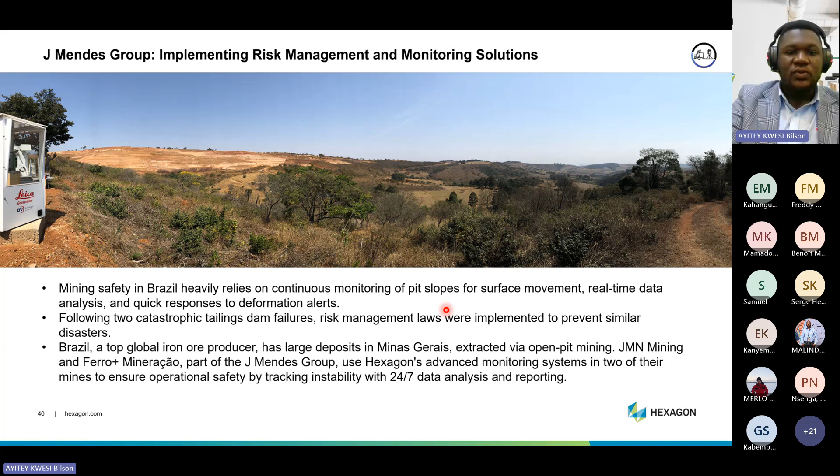This is what their pits looked like at the beginning of the monitoring event. But as it progressed, they had the TM50 and the Hydra X measure some cracks in their walls. You can see in the next slide an area that was moving rapidly, beyond 20 millimeters per day.